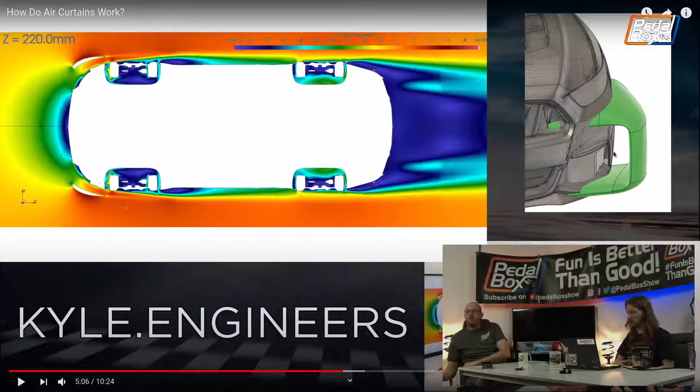So now on the screen, top right there, that horrible green warty thing, that is the air curtain that actually gets you a notable, detectable amount of thrust. You see them most commonly on the front of trucks - almost every modern truck from the last decade or so, if you look at the very front corner, has this little aerofoil deal that just bleeds out. It's exactly the same thing.

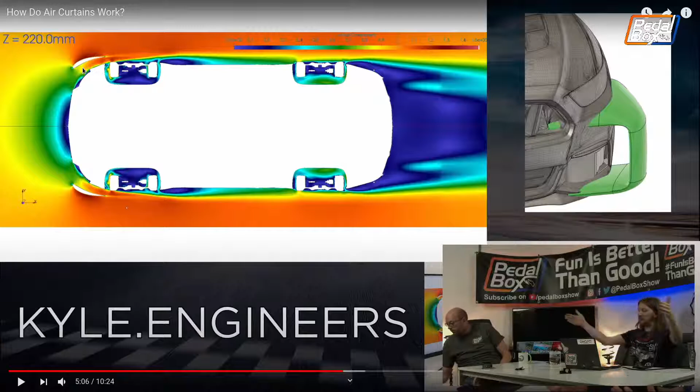The part I find actually quite interesting is on the CFD model here - you can see it's actually an aerofoil shape, not just a bent sheet of metal, which is part of why I wouldn't want to make one. But yeah, there you can really see where the thrust is coming from as it's redirecting the airflow around. I'm just going to put that onto there so I can have a better look.

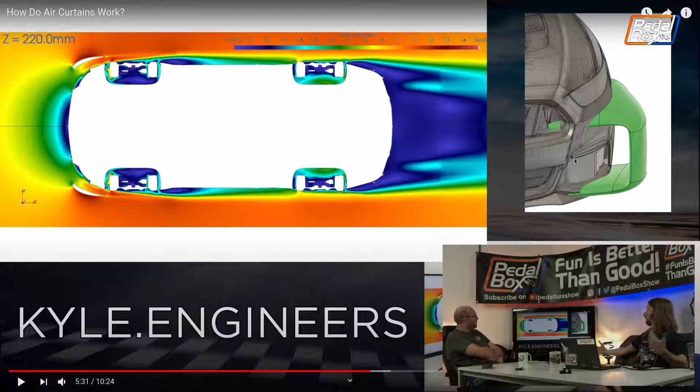It's such a ridiculous size of thing. This is something he designed - this is the most ridiculous possible version of this that I can imagine. Let's do this and see what it does.

Because that, I'm pretty sure, is a Ford - I think that's a Mustang. That's a current gen Mustang. So we could make something like that, probably much narrower, and it would still have some good effect.

And then in the real world, something you'd probably do - if I remember right, that was the fog light pod. Yes, and you get a minor improvement from blocking it off and smoothing it over completely, and another smaller improvement by creating a little bleed-through duct that allows air in. You can't really see it well in that thumbnail, but there's a little slit inside the front of the wing that allows air into the wheel well.

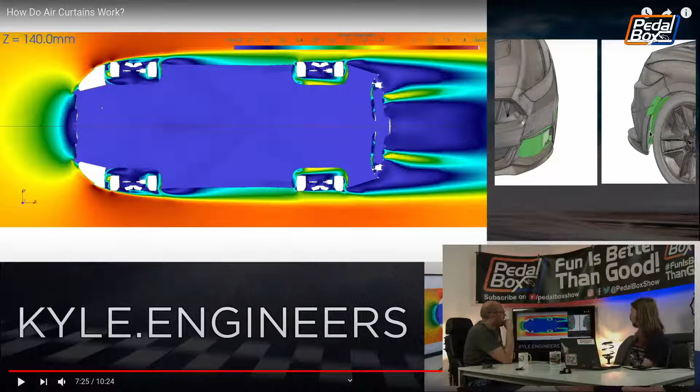That's totally doable with what we have at the moment because of how we've got things set up - that's eminently doable for us. Come back to turning vanes - yes, pretty much, but we could feasibly print the vane for the size we need. Probably, we could print what we needed. If Winged One's happy to help design it, we can print it and have it screw in top and bottom, into the body, sandwiched between the two.

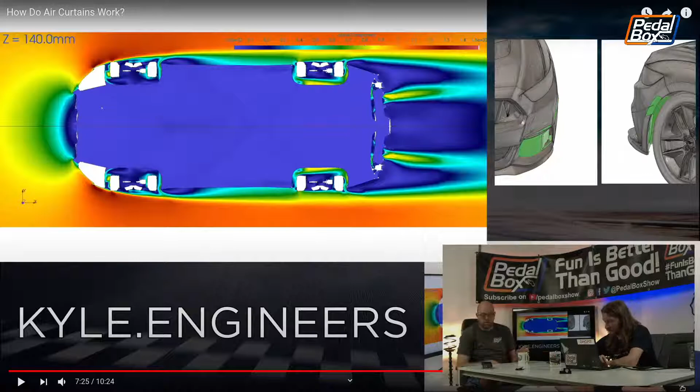I've been watching bits and pieces of his channel for years, dropped off it for a while and came back to it. This one here is really, really good as well - about fully decoupled suspension. I'm not going to go into it now, but it's a really good watch, and I'd strongly recommend it. It completely flipped on its head how I thought suspension worked. In my head, the ultimate dream was fully independent suspension where each wheel tracks the road perfectly - that's actually trash.

An ex-F1 engineer uses his wife's Kia as a prop to demonstrate air curtains. It's something we can quite easily incorporate, because I haven't designed anything yet here, this is paying dividends for us every now and again, and we can work that in really easily.

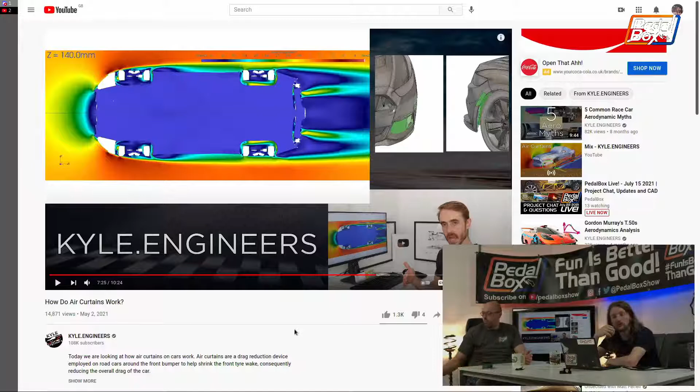Moreover, it actually answers a massive question of what do we do at the front of the car? That needs a bit of thought, sitting down and planning. If I've got something like that, I can plan it a lot easier, and work something like that in - okay, cool, I've got this defined area, this defined area, and something in the middle. That's one of the nice things about the front of the car being so undefined - we can, in theory, work pretty much anything into it.

Working from the front of the car, the first one is going to be extending the duct at the front, going forward, basically around the framework. So it's not just the radiator duct at the moment - it's this, and then scooping up out of the top, but it needs to go sideways as well, so that's two more little ducts. We actually want it exiting around - no, this is on the front.

This is on the collector side. Coming out where the framework is, there's basically two triangles in different planes, so it just needs a piece across the front of there, and that will feed into the rest of the duct. They're going to be aluminium rather than steel because they're further out, overhanging basically, and I'm trying to make all of the overhanging and high bits as light as I possibly can.

Congratulations on catching up, well done. That was pretty good work. You've caught up at 1.25 times speed, and got through an hour and 20 minutes.

So that's the plan for the front end. At least it's going to have something — oh, I took it off — something like the air curtain built on there.

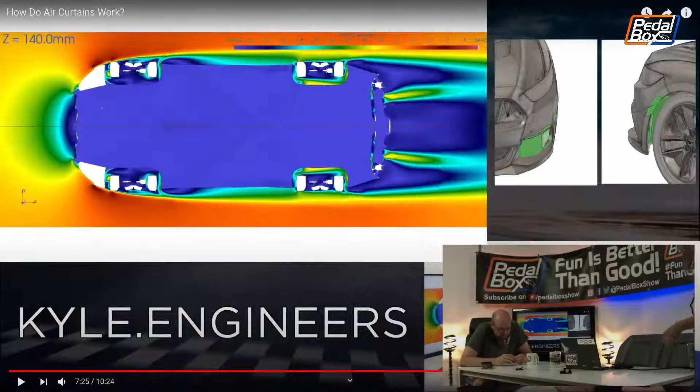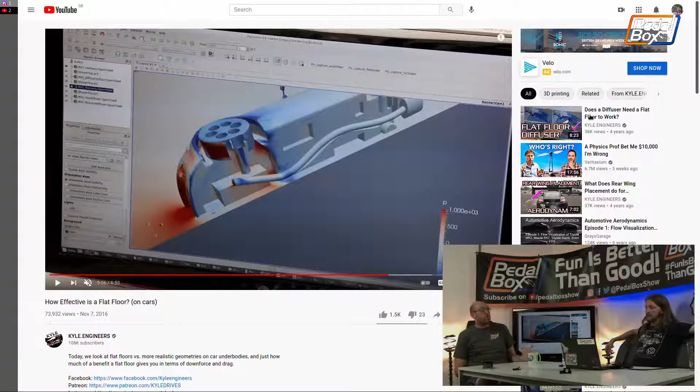Tomorrow I'm going to go and get some more sheet metal so we can start doing the clamshell over the back as well, which is a fairly simple piece, but what I need to work out is how I'm going to build the structure so it doesn't flex. Obviously I can't just have a completely thin panel of aluminium.

The question after that is, do we have vents in it, louvers or anything like that? If we have louvers in it, are we going to have plexi louvers rather than metal louvers? That's another complication to add in. If we're going to have louvers and we can see through the aluminium on the back, does that mean we want to put a window in behind us for a rear view mirror, etc, etc? So there's lots of bits that kind of stack up there.

I'm not against having a window in because of the way we've made the rear firewall, realistically behind us. We've made it in a section where the next one will go in over the top. Yeah, there is actually room for a window between us and the engine bay, and it will probably be a removable piece so that we can take it out just in case it breaks or whatever happens, because it's going to have to kind of pop in. I don't really want to weld that in if it's not necessarily going to sit right around the cage and have other bits.

So it's probably going to be a three-piece affair that goes underneath the cage, with other little bits that pop rivet on. But that means if we put that in, we've got to have brackets on the sides welded into the B-pillar, C-pillar area for it to attach to, and then we have to seal it. So it's probably the right way to do it.

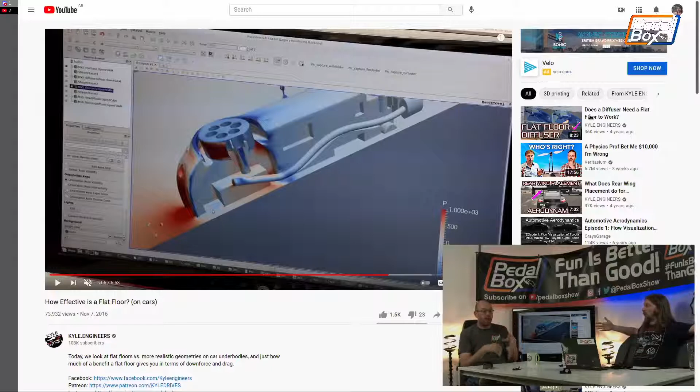Ugly to do, as we were talking about on the last stream as well. The stressed skin that we're going to have now with the steel welded on - this thing is going to be just crazy strong.

Pull up the PedalBox Discord to find this picture. So it's on the back here. This is a GT40 page on YouTube, and they've built this custom chassis.

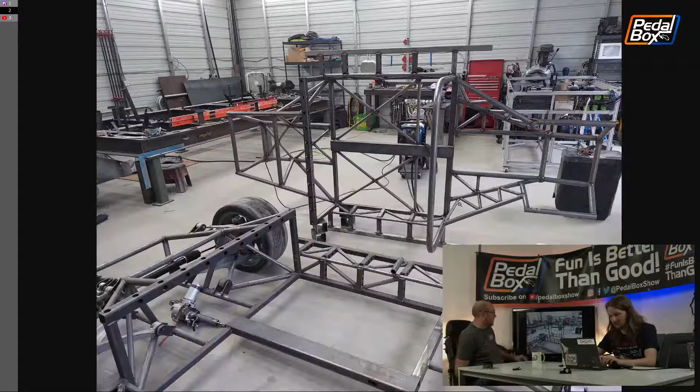And I found this, and I went, every day I'm reminded that I might have overbuilt our chassis just a little bit. Yeah, maybe. And I get that this is very much built on an older set of technology, to be fair. This is not the same stuff.

This has a dirty great 2 by 4 box section that runs right down the centre there. We have dirty great 4 by 4 box sections running out the back. Correct. So this is fun.

They have 2x2 around the frame of that, which is nice and simple. But you can see where it's got cutouts for things to go through, so it's probably got wiring loom and cooling and all sorts of stuff in there as well.

So we're definitely not going to flex, let's put it that way. We're not going to have much flex in the chassis to deal with, which is nice. This is a win. However, I probably could have made it a little bit lighter in reality, especially with a stress skin across most of the car anyway.

And it's why in a lot of places like the panels, I could make it a one piece, but it will take forever to make a big complicated one piece thing. I could make it out of fiberglass, but then I'd have to make a mold. I could mold it in situ, but it's a huge pain to do it.

So at this point, I'm making a few sacrifices on my plans because the impact is minimal, but the benefits are huge. The benefits are massive, and I still think we're going to be under 800 kilos all in.